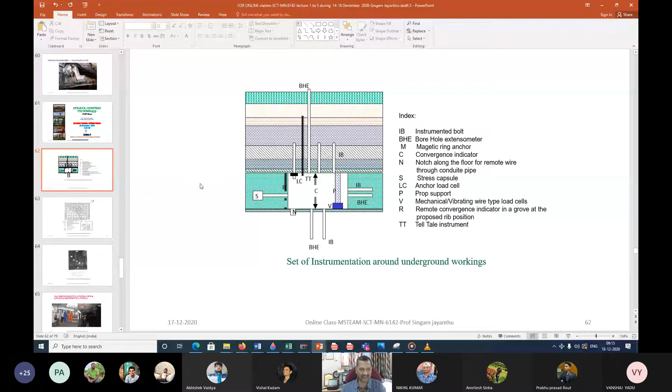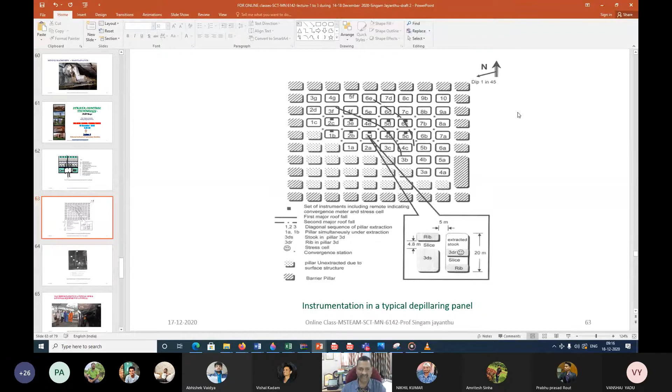And this shows in a typical panel, details we will see later, where these sets of instruments to understand the strata control parameters are installed, about which we are supposed to learn, and that we kept in the syllabus also. This is a very old one.

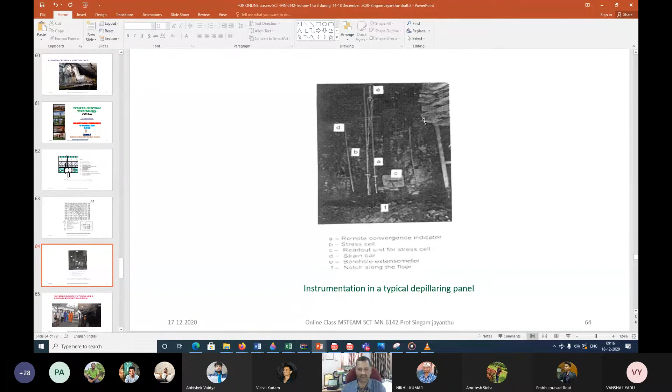From 1989-90, when we tried for the first time in India through a Ministry of Coal project on strata control in thick seam mining, when we failed in importing technologies like the blasting gallery at that time in 1988-89, these were installed in the goaf, and that behavior was studied through remote control with different types of instruments, where I told you we will be utilizing the latest technologies of wireless sensor networks, IoT, machine learning, all those things.

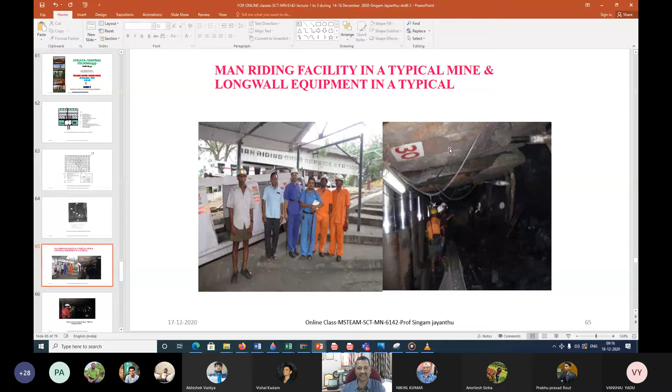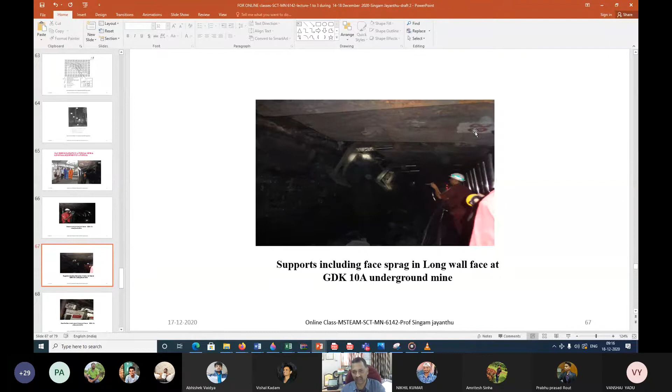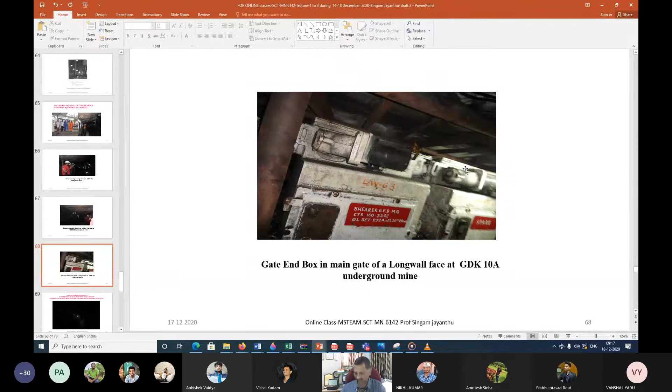And this, of course, few of you have seen the long wall panels at different mines, and how this type of strata control measures, including the shields. I hope you are able to see the number of the shield also here, somewhere 30 or whatever. So this is in the long wall panels, and for that whatever shearer, power pack, pump systems required even to operate your shield supports, these are all required. And a few of you must have seen some of the videos with strata control.

A few of you I've shown this before, but in a different context in previous semesters. But here we have new students of MTech and others. I would like to spare not much time on this, but a little time on showing how this Ministry of Coal project was done, where strata control instrumentation was carried out, which I am now showing you as a video.

Are you able to see this, my beloved students? I am trying to show a small video clip here where, as part of another Ministry of Coal project, three contiguous seams were worked, and strata control parameters were monitored. Just for 5-10 minutes I would like to show this, but let me know whether you are able to see it.

Yes, sir. Are you able to hear the voice in this? No, sir. Okay, no problem, I will give my voice, right?

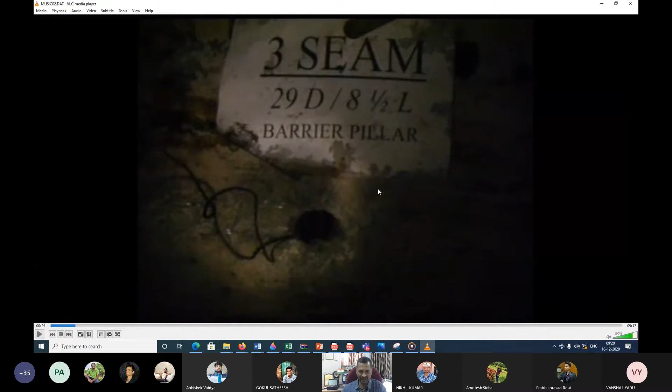So that when you are using different types of models to understand different strata control parameters, you will calibrate with that. At the same time, if there is 10, 20, 30, 40 kg per centimeter square, at what load, what stress there are cracks or it remains stable - all those parameters are monitored.

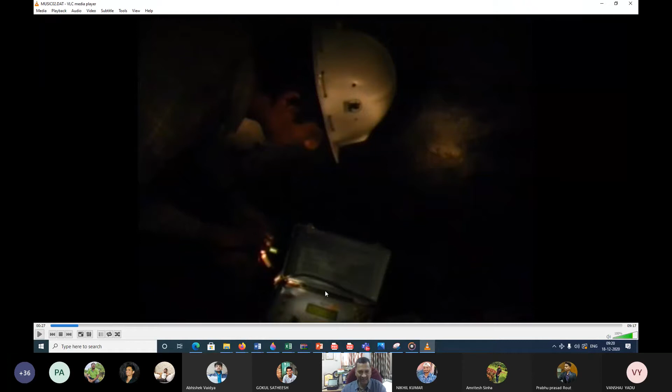And now you see, he is one of our scientists, at that time scientific assistant Damodar. Now he is a very senior scientist working in Canada. And here, these are different instrumentation and readout units being used for strata control parameter measurement.

I am taking you a little more in depth inside, where you can see how the coal in different seams was there - from 3 seam to 4 seam and 5 seam. There are small cross-cut tunnels, and now you can see how this coal is appearing in the field and how it is going to affect strata control.

So he is our Narayan, he is a general manager now. He was safety officer at that time along with me.

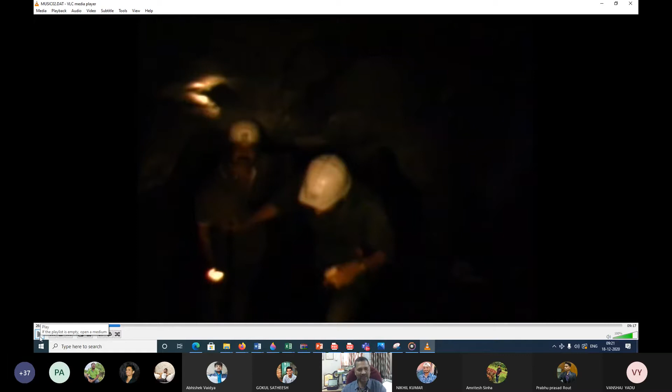And now we are moving from one seam to another seam, from 3 to 4 seam. You can see how this strata is appearing, because as I already told you while explaining modules 1 and 2, the geological parameters help us understand how it is going to affect the strata control or strata behavior.

That is the reason why I am showing you this along with me. You feel as if you are there with me, on my back or front, whatever you assume, but you are with me. Now you are going into another seam.

This is like a communication tunnel. In that place, it is around 7 meter thickness between that parting. That is the reason - these are the seams.

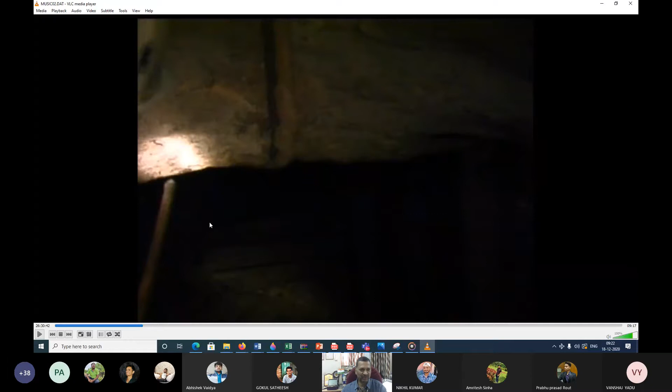Now you see the rock parameters - that is how this rock between the seams is going to affect our control. This is also part of the syllabus, module number 1. At that time I started doing all these things.

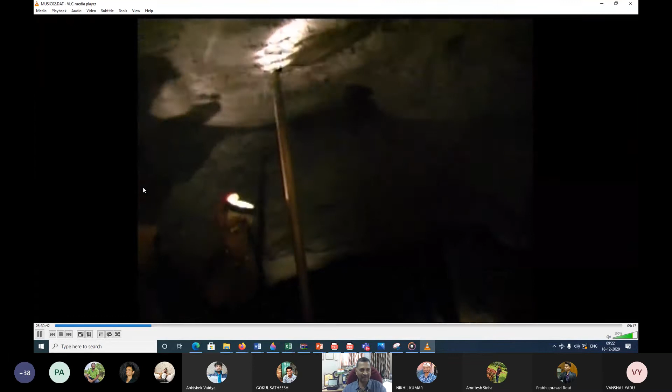You see the different carbonaceous shale in between, some type of streaks that are there - so many things you can now see, as if you are there on the back with me.

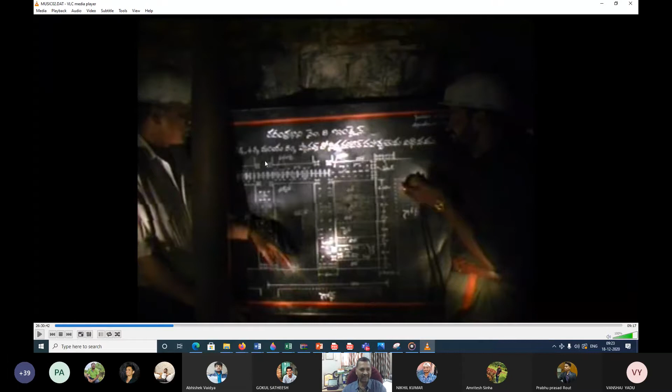And this is the strata control and monitoring plan, what we call nowadays, but otherwise this is SSR - systematic support rule under regulation 108 of the Coal Mines Regulations 1957. Now it is SCAMP, along with me, and a very senior overman selected for the experimental trial.

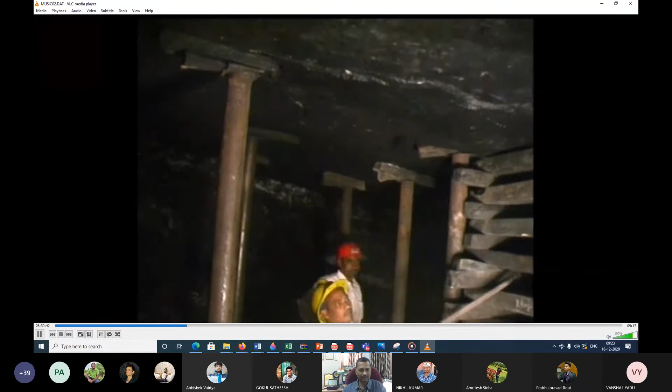Now let me know, my beloved students, how many are non-mining students in the MTech? Can anybody respond to me? Because the others already know this, I need not explain these things. Non-mining students in MTech, how many? Anybody want to respond? Almost all the students - 21 students are non-mining, sir.

One, okay, two please, right - are mining. My other beloved students should bear with me, of course, since they have already seen this but in a different context. I used to show not everything, but only partly while explaining mining methods.

That's the reason why I asked you people. Okay, don't worry. So these are different types of support systems used.

These props can be wooden props or steel props. Of course, hydraulic props were not recommended at that time. Now you can see on the sides how the coal pillar appears, and there may be some difference. I have not changed from the original, as the music02.dat file is kept just like that.

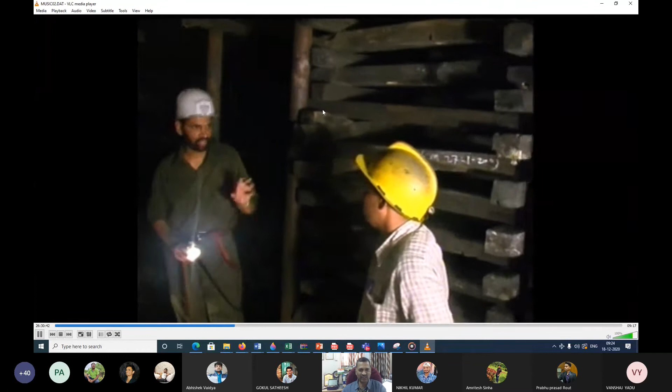Because mining is music for us. Now you see there are other very senior mining sardars and overmen, people under managers were there, and you can see chock support and how to design it, what should be the design, what should be the capacity, everything.

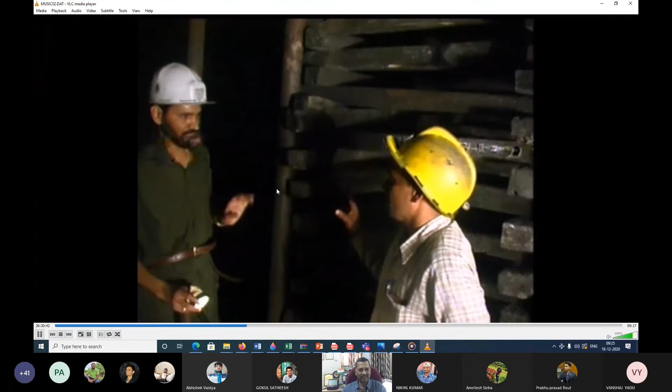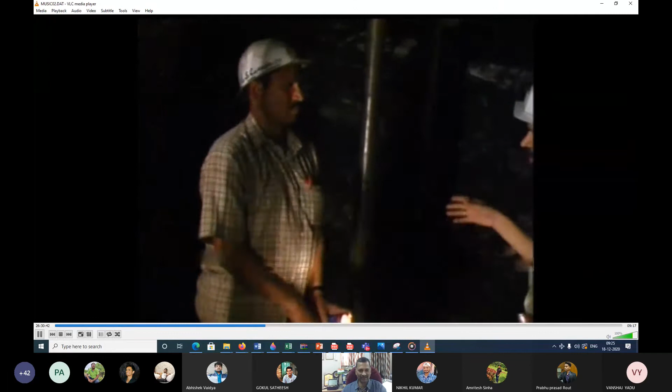Here again, you can hear the voice, but the reason is, whatever one is as a scientist, an investigator, a professor, or as a person for that matter in life, it should be understood from the level of implementation. That has been my mission and aim all the time.

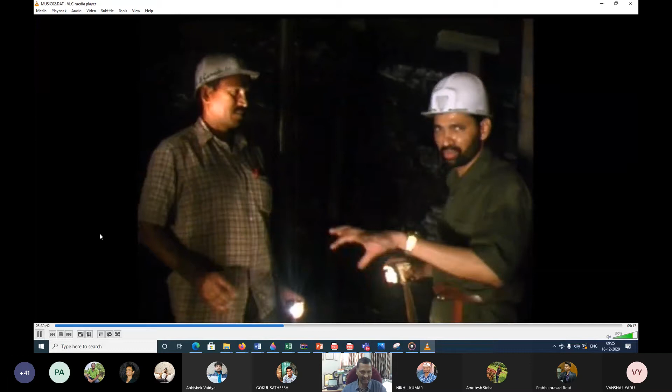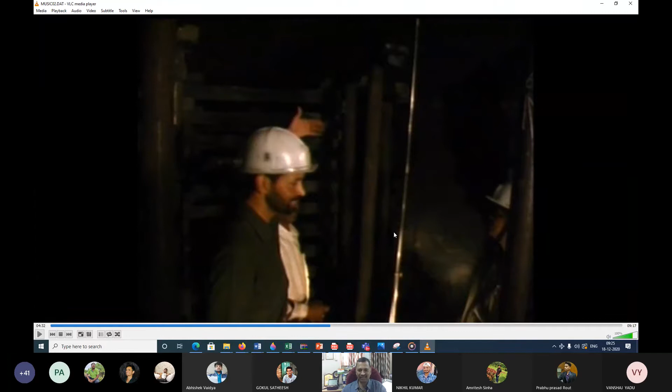So this is the way to explain and help people understand much better. It is to change the support system, and now I'm going further, into a different context we can see. Right, so these are some types of instrumentation to understand, a very simple telescopic convergence meter here.

And this is simply measuring from the roof to floor level what the convergence is, right? Beside me is our Mojumdar, who was working with me on that project. Now he's a deputy chief controller in the coal controller's office. You can meet him, he will help you.

Right, so here is Rahul Rajan. He has been working around 17 years in this mine. You must have understood, I told you experience needs many things. So I selected persons for experimental trial with a lot of experience, those who could understand and implement properly.

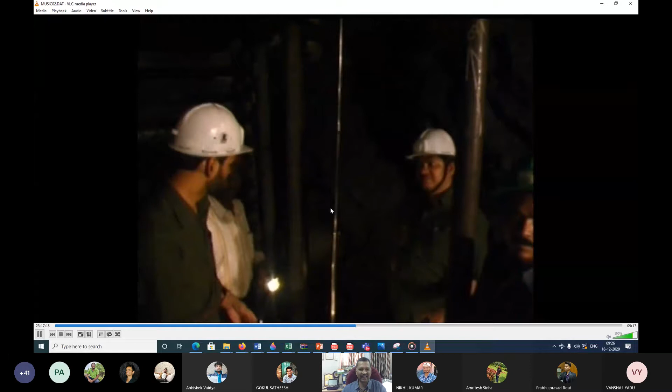Now, going a little further, let me take you inside. Now you see sir, these are different ways of transporting coal. This is a coal tub of around 1.5 tons, 1.25 to 1.5.

And you will be surprised to know that along with my project, under the guidance of Professor R.D. Singh, about whom you have been studying his book, as a scientist of CMRS I used to give a lot of material in preparing that.

I was doing a project on longwall mining in 1983-86, and along with that, I used to study the tubs and their design performance, other than whatever project was assigned. There are so many important and critical issues which other people could not understand or didn't want to study much, but it is part of the total mining industry where improvements are required.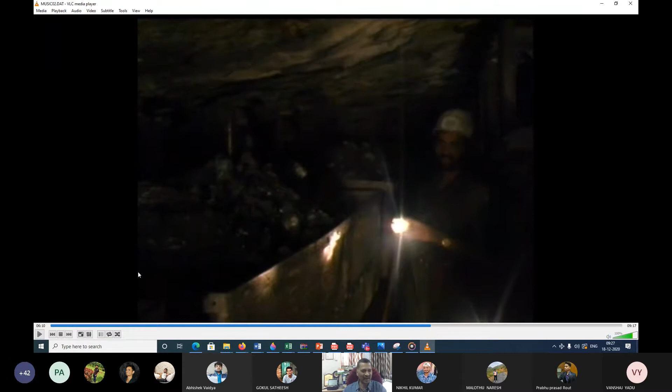But still we are using these tubs. We need a lot of improvements in that. Right, so this is a means of transporting coal, and with the props you are seeing here.

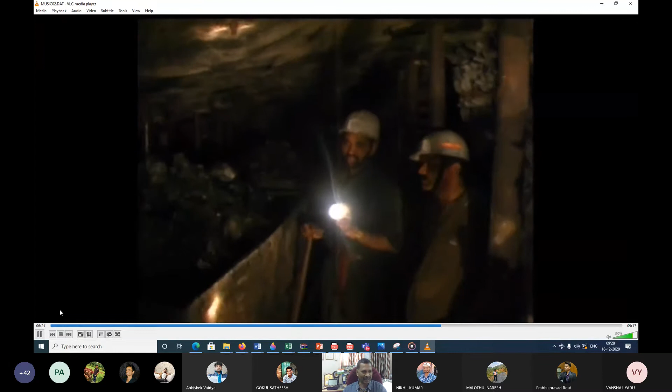I am not going to explain the mining methods, but I am showing you the strata control issues here. When it is along this side, all the props are there, and you see our Narayan is beside me, and the props, and then in the roof there are roof bolts.

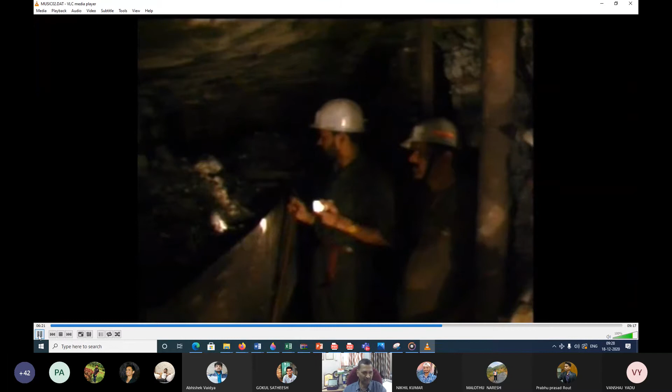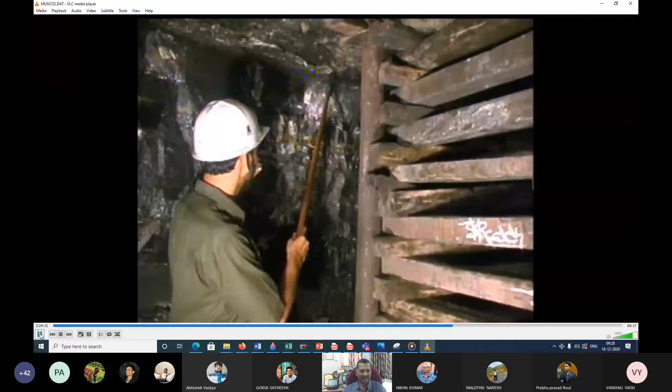I hope you may be able to see it, let me move forward so you can understand. Roof bolts are here, and now, my beloved students, I am taking you inside the goaf, how it appears. And don't worry, it's not allowed for the general public to take video and photo.

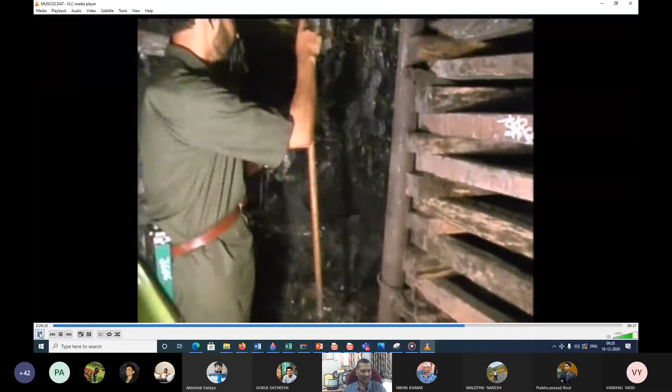Excuse me, sir. And I already told you, this is part of a very prestigious project of the Ministry, and special permissions were taken from DGMS and mine authorities.

Now you see, my beloved students, this is the goaf after the major fall, how this roof appears. If it is at seam number 5 and nothing is there on top, if it is seam number 4, then seam 5's goaf is there, and if it is seam number 3, then the goaf of seam 4 and 5 are there. That sequence you can understand easily.

So this goaf behavior, whatever I told you, in 1989-90 that was the first time we tried to understand it, and now I need from you, my beloved students, in the next generation, to have such typical instrumentation with transdisciplinary wireless sensor networks, and later, of course, analyzing that data through artificial intelligence, machine learning, digital India, smart mines—all those things are required for us.

Hearing inside, you are supposed to understand its behavior. That is the reason why we are studying strata control technology, and it is also there in the syllabus. Now you see adjacent to the goaf how these workings appear, and the goaf supports skin to skin chocks.

Before this goaf settles, it gives a lot of sound, something like a tsunami type of behavior. You will have qualitative observations, including sweating because of cracks when a lot of heat is dissipated through them, with increase in temperature. There are other issues like water seepage too. I don't know whether you are able to see a beautiful drop of water somewhere here. These type of things are there.

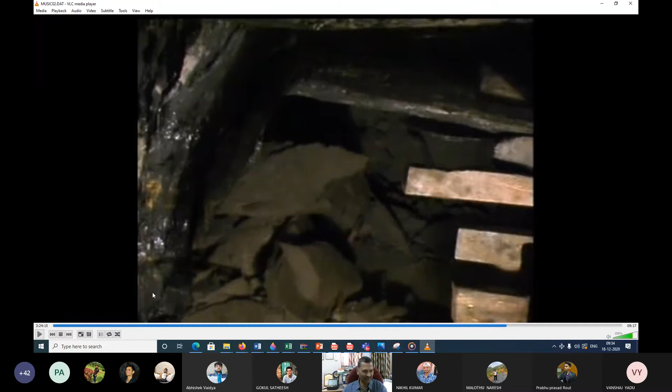These are some typical experiences of strata control which we will be sharing with you later. But this is the reason why this syllabus is framed.

And now this here is our Atul Gandhi, who was research associate with me. Now he's a very senior officer, after Golder Associates implementing paste filling first time in India, and now in Kolkata with another company in a very senior position. Atul Gandhi, in fact, he was making this...

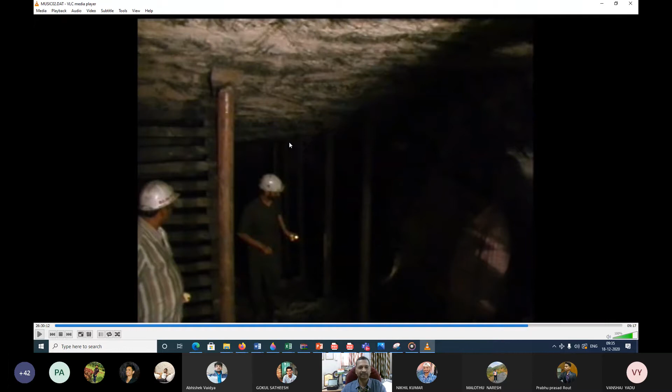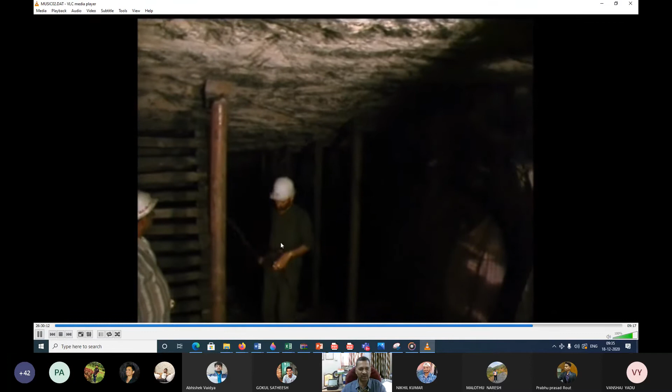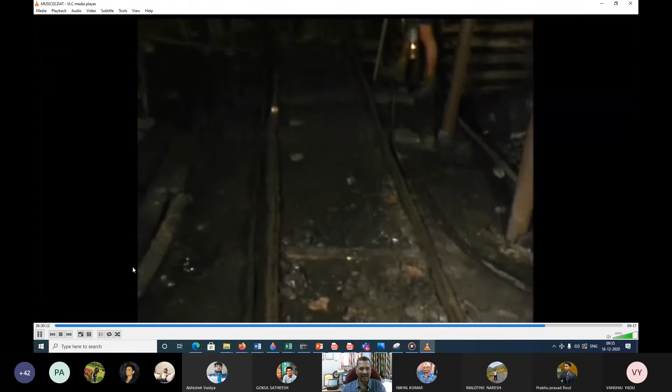And this is the reason why I was showing you, my beloved friends, you are inside this Singareni Collieries Company. Right? It's a chock support, props, how it was installed, you have seen, and you are taking the tool outside from here and roof bolt. It's showing the roof bolt. I will stop this video further.

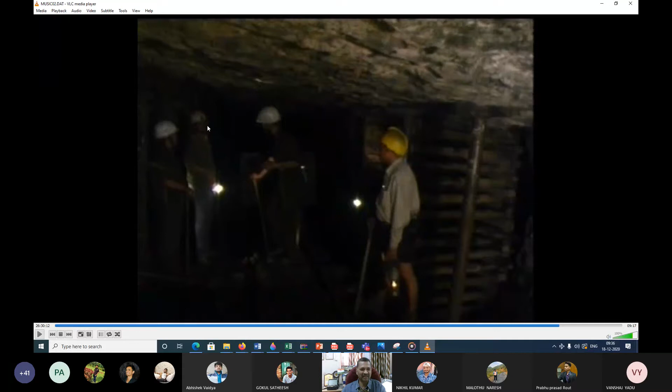But here I would like to take up your questions. Along with me, already you have seen our Mojumdar. Narayan was here, now he is general manager RG2 area, and he was SO to GM when we closed, taking a decision based on our analysis of fire proneness in GDK 11 incline, for one of the panels, right? When we closed it, we were together to take that decision, and Mojumdar was here, okay. Now, roof bolts.

Now you can see how it's bolted. This one you try to observe. This is a roof bolt. To those at least, especially those who have not visited the mine, now I made you to be with me at this place.

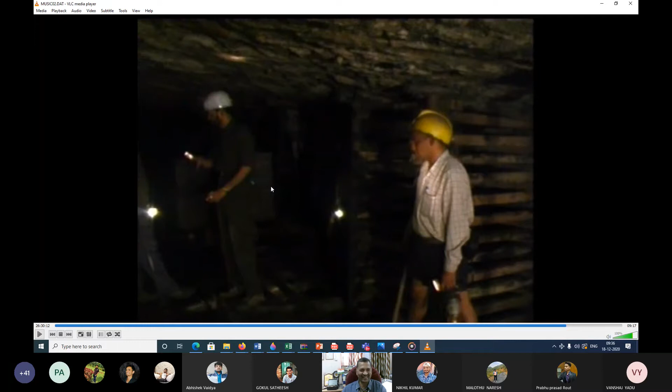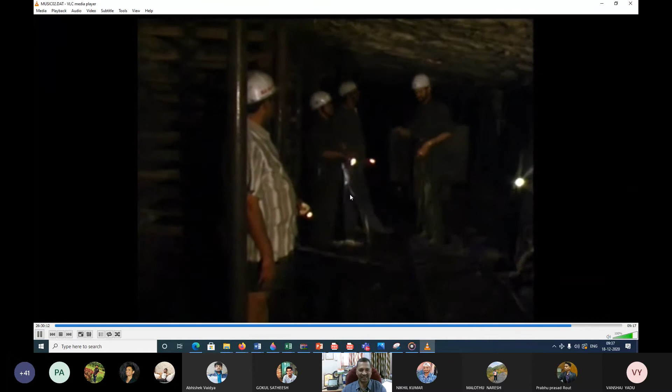You may not be feeling that cold in this winter, but this will be hot with more than 30-35 degree temperature. And now you are there, right? You should ask me questions. Already I encourage you to ask.

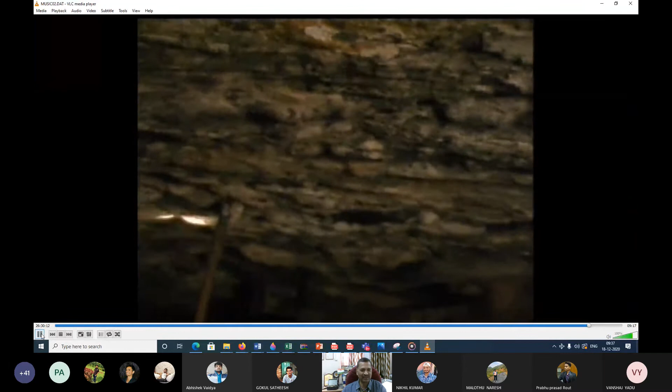How it is installed with a plate and then the nut, and then this is there for 1.8 meter inside. This is a sandstone with some carbonaceous shale and other things. From 5 feet, and this is how it appears, the sides and all props, how it is.

These are there as a part of your and my beloved students of Strata Control Technology. So he is none other than our Atul Gandhi, right? I have given at that time video to somebody else. We have not made this video by any special people, but it is done by a scientist, and of course he was a research associate with me in my projects at that time. Atul Gandhi here, you can see him, right?

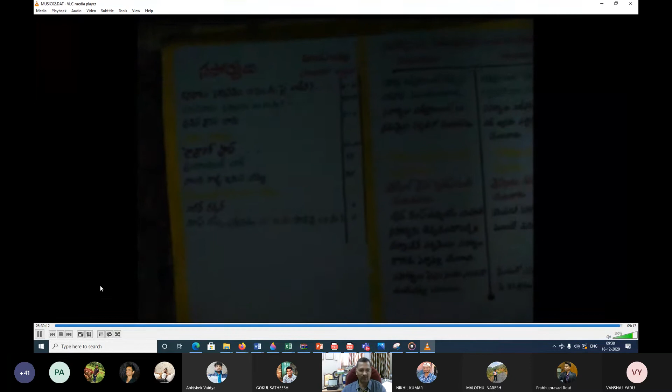Now these are the wooden props, right? And also steel props and so many types of supports. I made it so that as a part of Ministry of Coal project, many people including from the ministry, also people to visit these panels, they should understand, and they can hear, you can see how systematically this gallery is there, shows even the name of steel prop, so many things, and I hope you understand part of this, and this is in Telugu, don't worry. Now language is not the barrier nowadays.

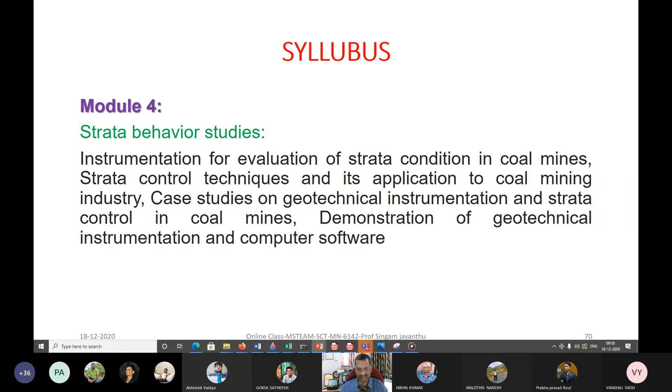And as I already told you, my beloved students, software results are less than 5% reliable unless you calibrate, unless you understand the field situations. That's why whenever you get time, engage with some case study problems. There are so many problems in the industries, and you can get associated with me, especially as far as strata control is concerned.

And last but not the least is module 5 of our syllabus of strata control technology, which is organization of the strata control cell. Here I say with proud privilege that as part of National Institute of Technology Rourkela, we were specially invited by the then CMD and DG, later Chairman of Coal India Limited, Narasimha Rao Sahab and Sibal Sahab, for the 10th Conference on Safety. We were given the responsibility of training in India on strata control, establishing this, and preparing some DGMS guidelines on the strata control cell, which have since become part of SCAMP. Now it is the strata control cell in mines, which was established as part of the 10th Conference on Safety in November, New Delhi, in 2007.

It was conducted, and I was a part of it, as I told you. Training needs of the first line supervisors. Already you have seen some of our people like Rautu Rajam and others who were the senior-most whom I selected at the time for experimental trials through the Ministry of Coal.

The supervisors need to be trained, and all the supervisors involved in strata control, because we have so many lives working under their supervision. And unless they properly understand the strata control measures, there may be a lot of disasters which we have seen, and I can give you n number of examples, depending on your interest to understand better and become the best strata control engineers in India, if not in the world.

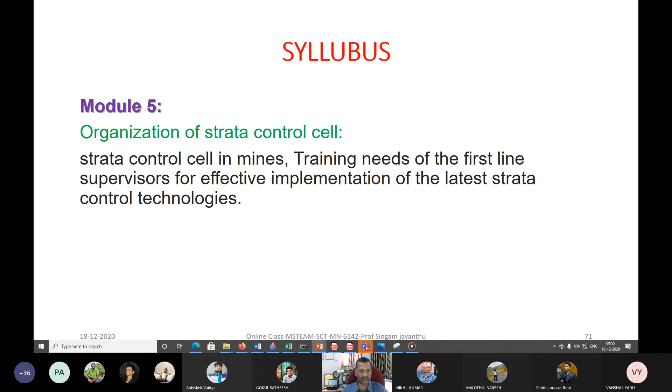Many people used to ask me about essential reading, whatever is there in the curriculum. There are so many books. In addition to this, I will tell you. You need not note down, but you can note at least the names: Jeremic and other people on strata mechanics in coal mining of the Balkema series, then SS Peng and Xiang, so many books by them, and Bieniawski, strata control in mineral engineering, and John Wiley.

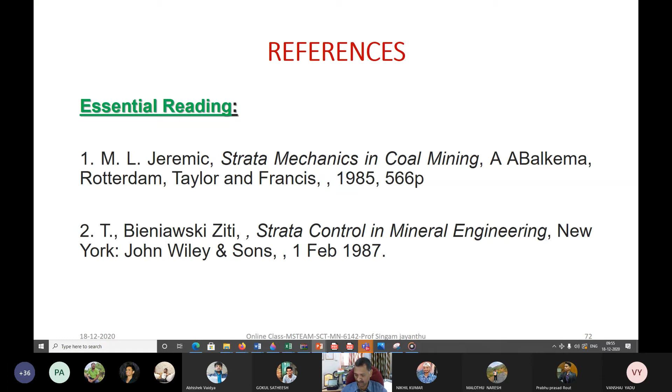There are latest books by some of my beloved friends, maybe Professor S.K. Das and other people from IIT Kharagpur. He was with me in Germany for some time. We were together on strata control issues at an international conference on roof bolting in Aachen University long back in 2001, where we were discussing this, and some parts are there in his book.

Now, for supplementary reading, there are so many things. Dr. T.N. Singh was my PhD guide also, with whom I worked for 10 years as a scientist in the mine model and mining methods department. He is a pioneer in equivalent material models, and later, along with the team of Dr. P.R. Shaure, Dr. Sarkar and others, and Dr. Saxena on the subsidence and other issues, we learned a lot at CMRI under the directorship of Professor B. Singh.

Along with him, I was there for 1-2 years directly working for CIMFR, now renamed. In 'Underground Winning of Coal', he has given a lot of examples of strata control, including some of the experiences I told where I was involved in the experimental trials. That book also mentions this.

Then Hudson's Comprehensive Rock Engineering gives very good comprehension on so many topics, even edited books are there, and a few I kept here as a tribute to our very senior personalities, eminent scientists with whom I was there for a long time in my initial career: Dr. T.N. Singh and Professor D.P. Singh, who was vice chancellor for so many universities, Lucknow, Rewa, and all. These two were my guides from IIT BHU and CIMFR.

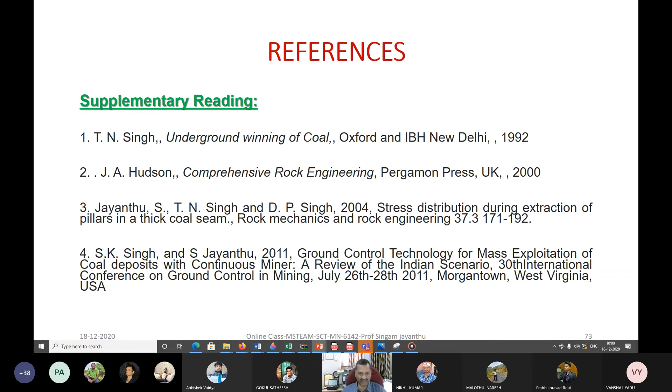And he presented on my behalf also there in West Virginia, where I was presenting at the Mine Safety and Health Administration and NIOSH, National Institute for Occupational Safety and Health, on strata control, which I showed you some videos of in the last class. He represented me there in the recent one, 2011, and I was there with them in Pittsburgh, West Virginia in 1998, interacting with Professor S.S. Peng, Chris Mark, and Kramer, all those people. Later I will tell you all those things.

Now we are coming to a very beautiful part. We have 10 minutes more, my beloved students. I will not take more than 5 minutes, because our main purpose is learning-based education. I need not feed you with A, B, C about mining or strata. You already know up to at least KL, and I can start from MN, and that's what our mining department is for, for those who are not mining by BTech.

Don't worry, my beloved students, you can get a lot of information through the website and all this explosion of information, but it all depends. It is flowing like a river, and you have to take it in your hands, as much as you need, you must drink.

So that's what is required for the learner. I know, my beloved students, as your faculty advisor, that you are all sincere and you will make our NIT Rourkela feel proud by becoming the best strata control engineers in India, if not in the world. I can vote for that on behalf of you.

Now, assignment topics, this is how we select them, as an extract from clause 7.2c of UG academic regulations, which may also apply in PG everywhere. Some of my students here are executive PhD scholars with a lot of experience as general managers in different organizations in India, from CMPDI, IBM, MCL, SECL, Jindal Steel, MOIL, and they will also be helpful to you during interaction. This all depends, and that's what I told you.

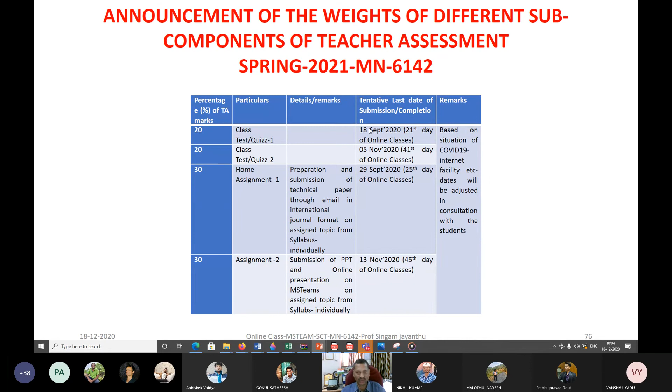So because all the classes, everything I have written, class 1, class 2 up to class 30, 40, on which date and when there is a holiday, all those things. Based on that, on the 21st day of your classes for Strata Control Technology, this is on the 5th. So this will be on the 5th. I am modifying it now. This will be 5th February, you note down, for your class test. It will be conducted for 20 marks. This is 5th February, right?

And then your class test 2, let us not worry about these because based on the COVID situation we will see. And your home assignment, we have made it before 15th February, so that will become the 25th class of this semester. That will be 15th February. So this is our schedule.

And then for assignment 2, don't worry now, that depends on the COVID situation, we will decide based on the COVID situation. So don't worry about this. The same applies for number 2.

This all depends on the COVID situation. I wish this COVID should end and we should be in a position to meet personally, see, greet, have tea together and eat something.

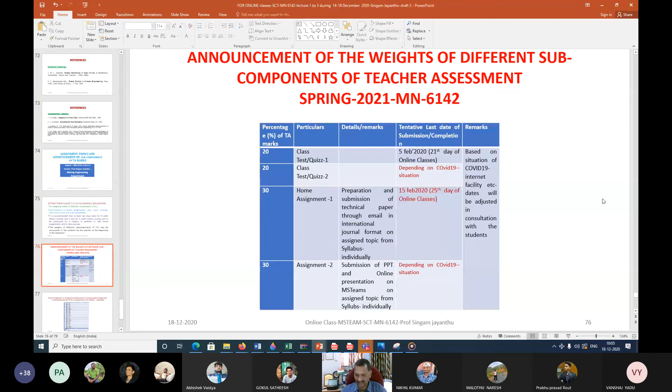I already made the list and am displaying it here. Your duty is assigned: one CR for BTech, CR for dual degree, CR for MTech. The 3 CRs should be in contact with me within 1 minute. I will close now.

Then you should collect all these topics of their interest. If any doubts, they can discuss with me anytime, either through WhatsApp or our group. Similarly, for ground control instrumentation MN3724, try to have a group of your CR.

I would like to say, but let me have this, because I have so many things to show, but depending on your interest, I will do that.

I wanted to take you to that Vakilpalli mine with me, but I was also taken there by one of my MTech scholars, Maharshi. He must be giving his CIL interview now with a lot of experience and confidence, having seen this latest fatal accident and strata control, whatever knowledge he has gained through association with me in so many projects. He must have fared well and must be having a lot of confidence. This is what I wanted to show you, but we will keep it for next time.

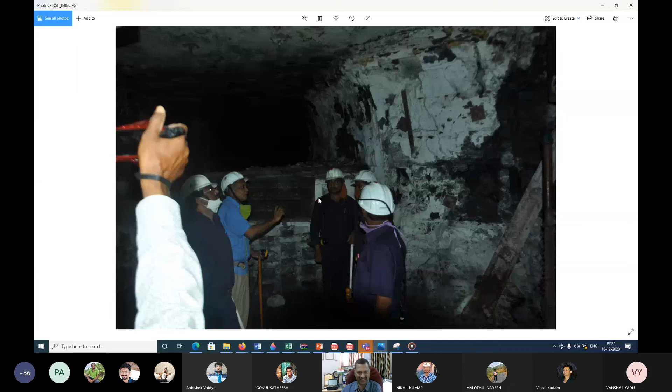I wanted to take you inside the mine, but now I am not taking you. This is the place showing how strata control in multi-thick seams appears. But now let us go to our...

Answers for your CEP. Otherwise, anybody who is answering your CEP 1 and 2? Because that will be given only 1 minute. My time shows 9:57, 58, so within 2 minutes we should close.

Now Gokul Satheesh and Nitin wanted to say something. Tell your name first. Sir, Nitin Singh. Nitin, okay, answering. Sir, I have seen that in the video there was no metal support, so I answered CEP 1. It's very good metal support, metal fence support, and its capacity is near about 16K pounds.

Very good, anybody else? Very good answer by Nitin. Yes, sir, Gokul Satheesh also want to answer.